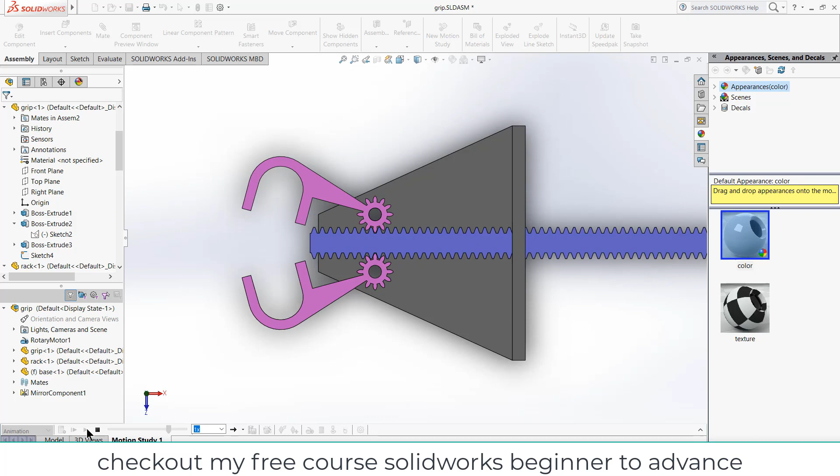So let's start. First of all, go here, click on assembly, click OK. After that, what you need to do is go to your toolbox, click on it, click on add in now, click on ANSI metric, click on power transmission, click on gears. Now import this rack.

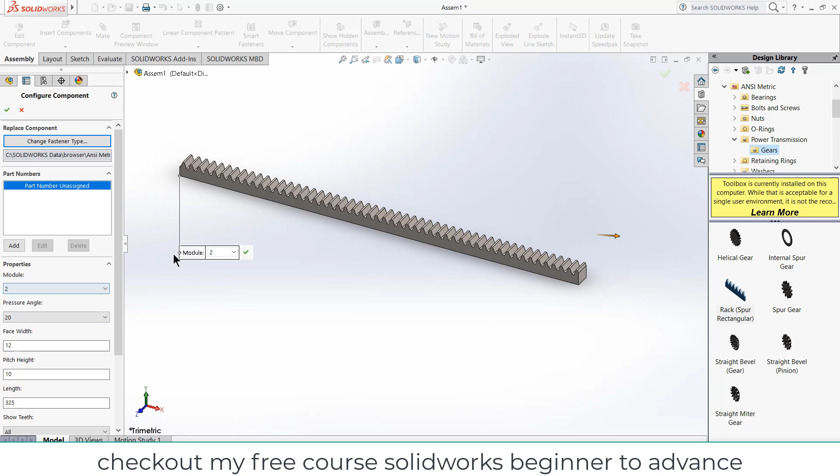Okay, make sure that the module is 2, pressure angle is 20, face width is 12, and total length is 323 point whatever, you can say 325. Click OK. Now close this. Select this face, click on sketch, press Ctrl plus 8. After that, click on convert entities. As you can see, the black line we already got.

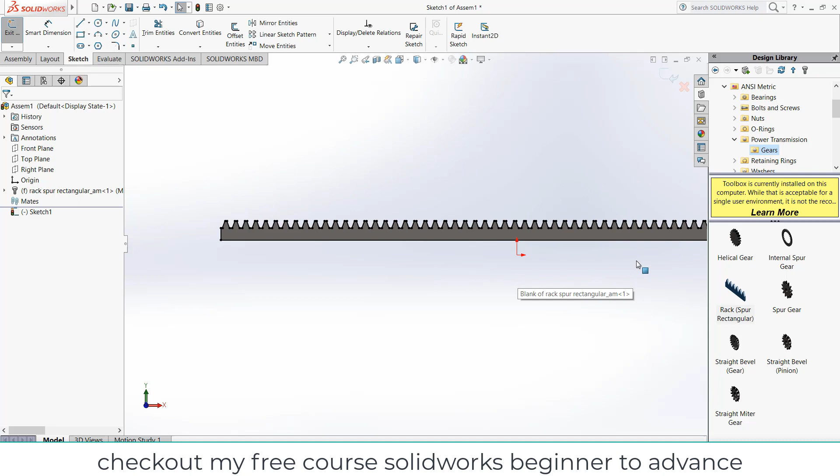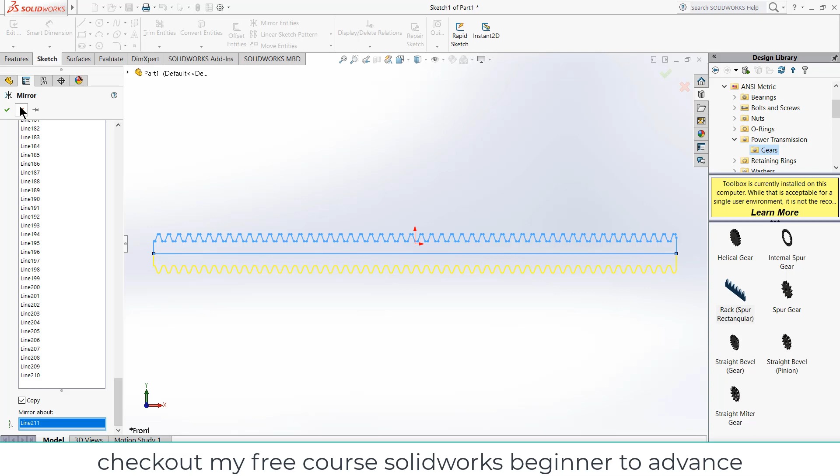Now what you need to do is press Ctrl A, press Ctrl C to copy the sketch. After that, click on File, New, Part, OK. Select the front plane, click on Sketch, press Ctrl plus V. After that, go here, Mirror Entities, move downwards. Click Mirror About, select this line, click OK. Now go to Features, Extrude it. OK. Extrusion is 10 mm. Click OK.

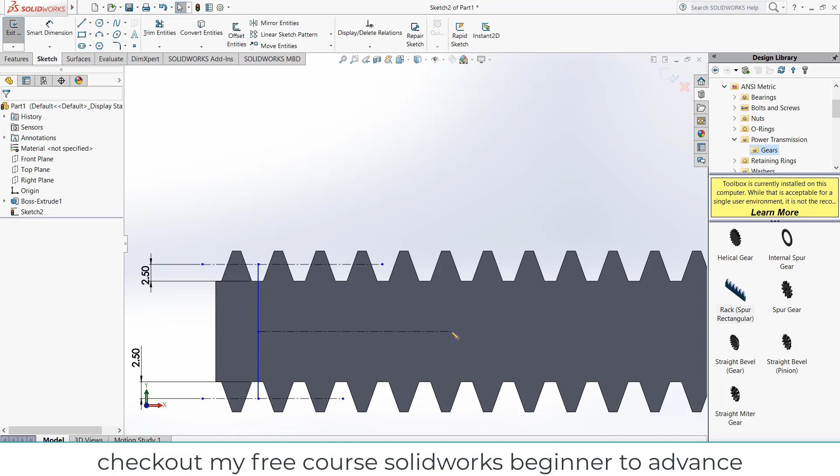So if I click on this face, click on Sketch, press Ctrl plus 8. You need to draw some lines as I'm showing. Same here as well. So these lines are 2.5 mm. Similarly here, 2.5 mm, and draw a line like this. Draw a center line. So just remember that this distance is 10 mm. Okay.

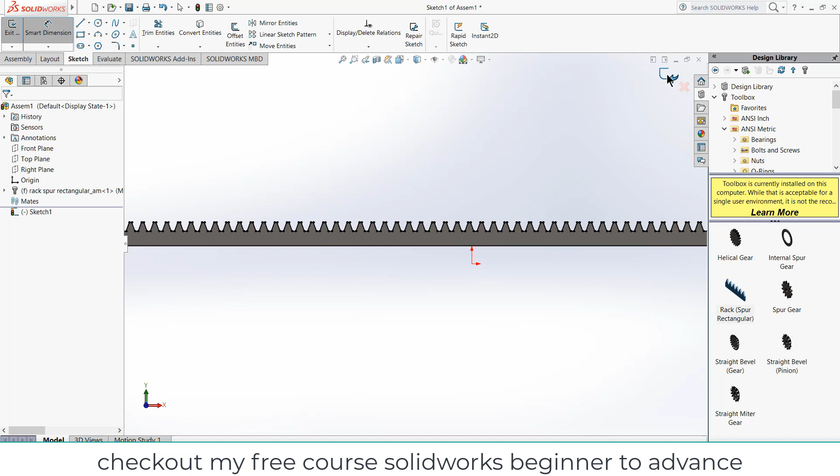A question may come to mind: why do I make this sketch when I can simply import it? The reason is that if I use or save this or do any kind of modification on this library part, it will mess up my whole library. So I don't want to mess up my whole library. That is the reason I create a new part from this sketch. Okay. So click OK, exit the sketch and right click on it, delete. Remember, I don't want to do any kind of modification in this part. That is the reason I'm not going to use it, because I'm going to save this file later onwards. That is the reason I create a sketch.

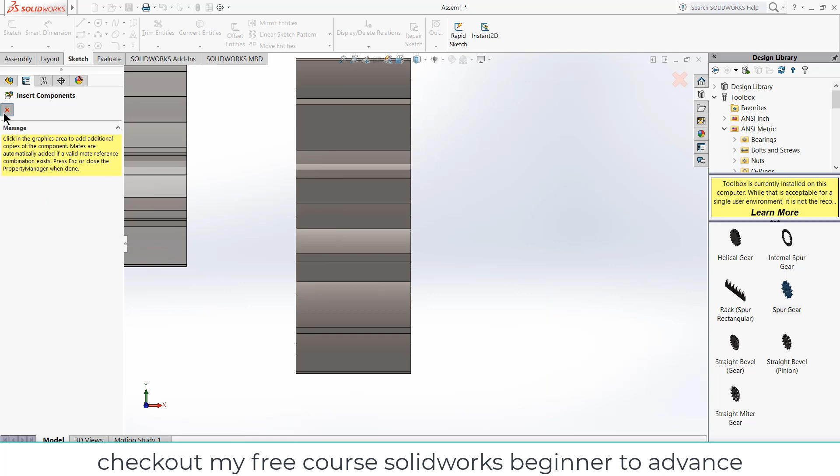Okay. Now, similarly, select the spur gear. Make sure that the module is 2, number of teeth is 12, and pressure angle is 20, face width is, let's say, 10, and click OK. Select this face, click on sketch, press Ctrl plus 8 for normal to the view, click on convert entities. Oh sorry, before we press Ctrl A, select this edge as well, click on convert entities. After that, press Ctrl plus A, press Ctrl plus C, yes.

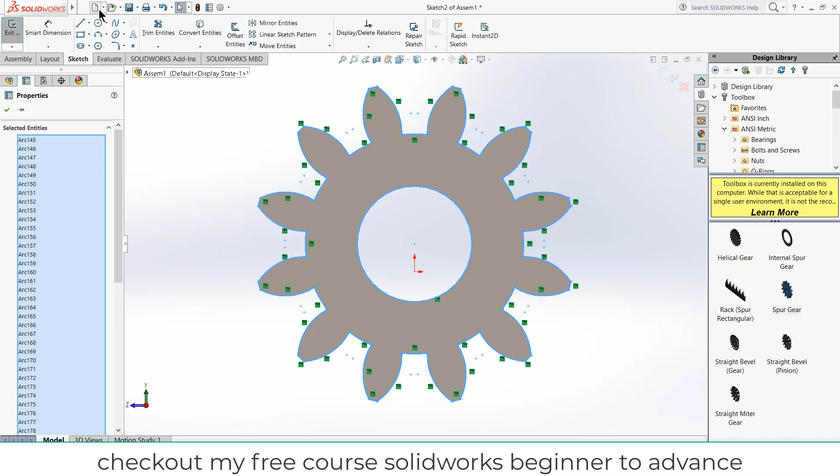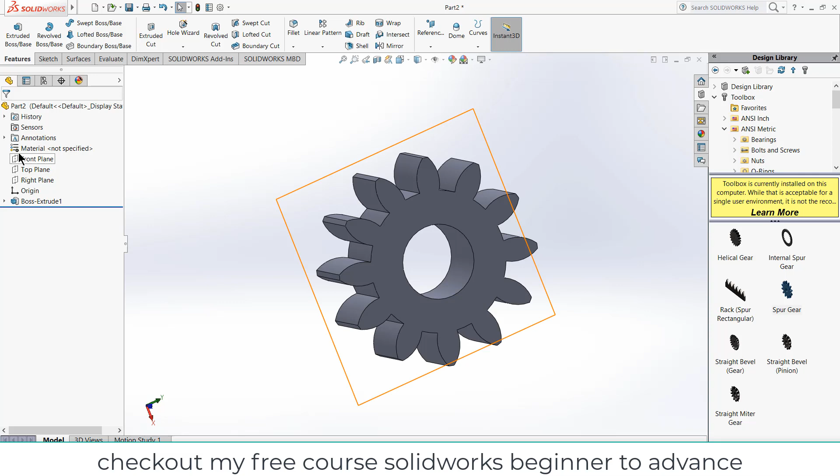Now go to File, Part, click OK. Select the front plane, click on Sketch, press Ctrl plus V, go to Features, Extrude, 10 mm, click OK. So we have made our gear as well. Now we are going to do some little modification here. So select this face, click on Sketch, press Ctrl plus 8.

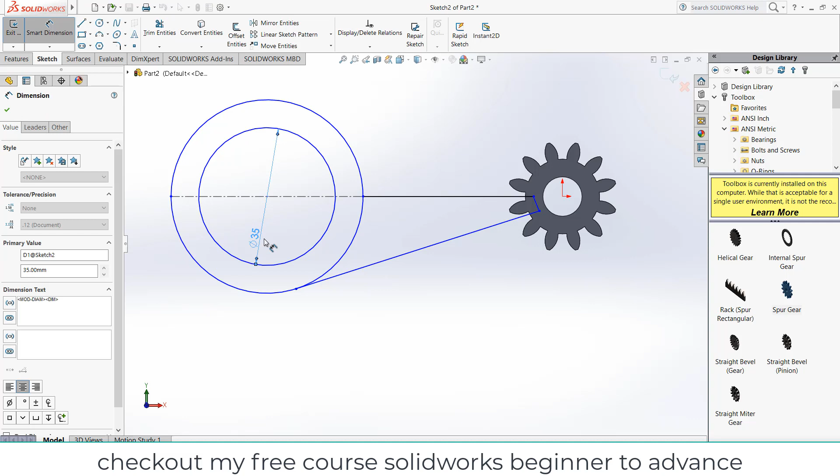Escape. Now select this circle and select this. As you can see, tangent relation is already there. That's what I wanted to create, but it's already there, so I don't need to give any kind of relation. Give it dimensions as per your requirement. Let's say 35, and this one is 50. Now click on trim entities, trim these.

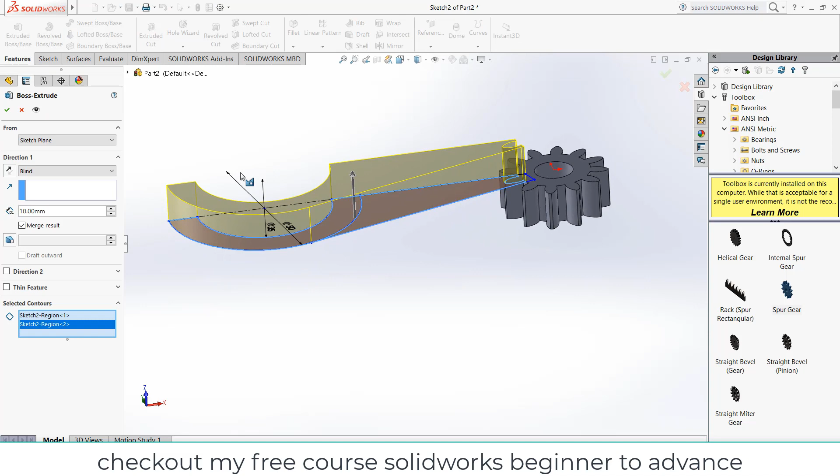Now one more, escape. Now go to features, extrude it, select this face and this face, and this one as well. Click on reverse direction, click OK. So we have made this. Now press Ctrl S, name it as grip. For the first part to be saved, first exit the sketch. Ctrl S, name it as rack.

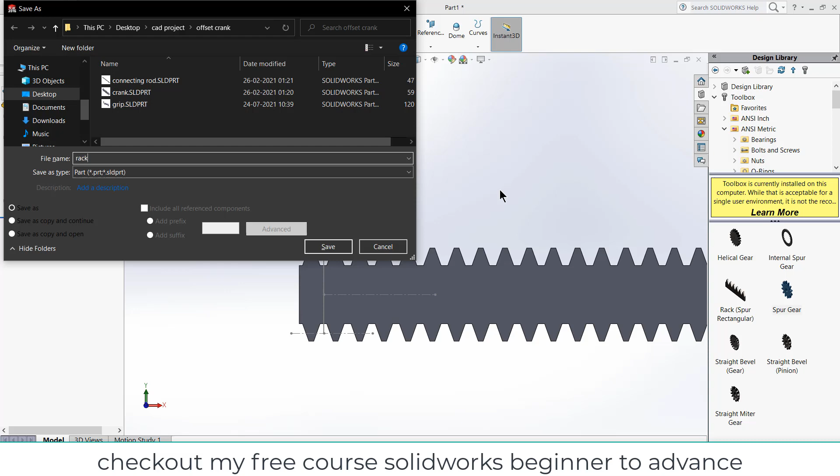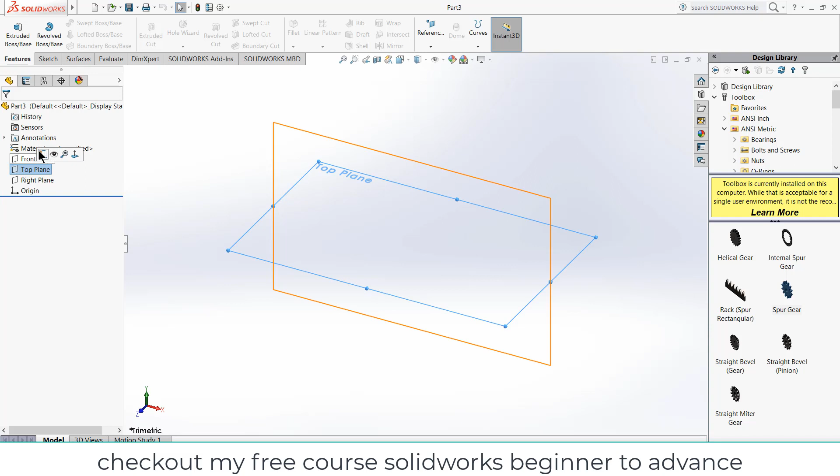Now click on here, click on assembly, click OK. Import these two by pressing Ctrl. I have to make one more part on which basically they are both going to attach. So let's make that one first. So click on file, part, OK. So select the top plane, click on sketch, escape. Okay, select the front plane, click on sketch, front plane, sketch.

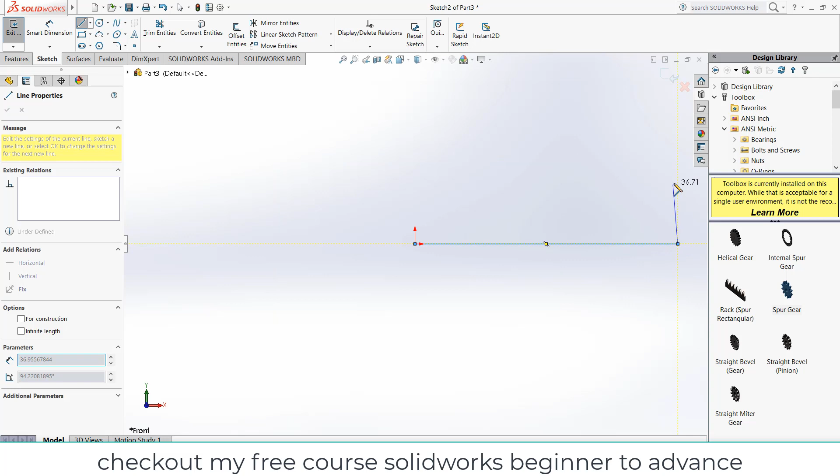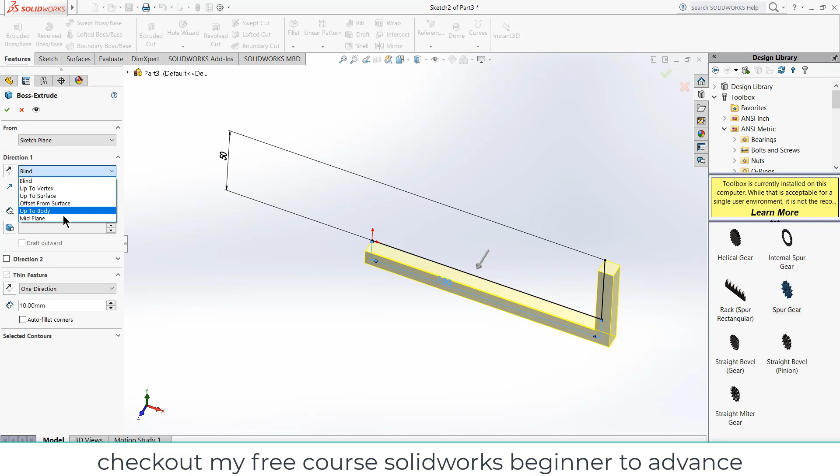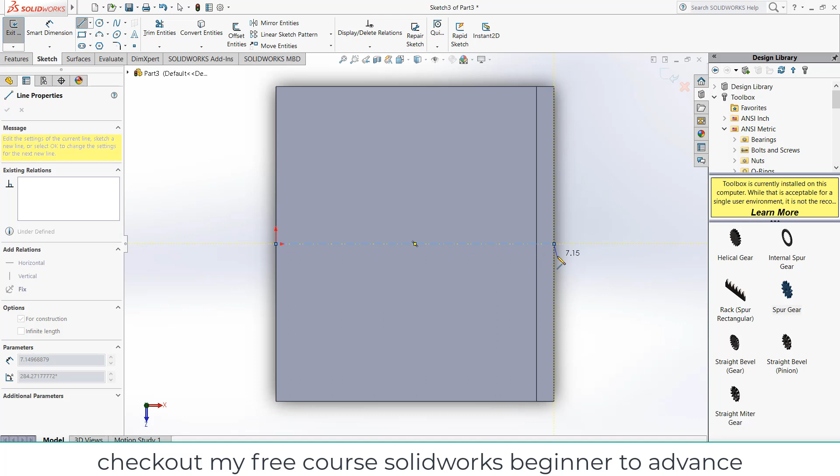Escape. 50 mm, 150. Go to features, extrude it, mid plane, click OK. Select this face, click on sketch, press Ctrl plus 8. Draw the center line first. Draw a circle here. This one is going to be 10 plus 2, or 12.

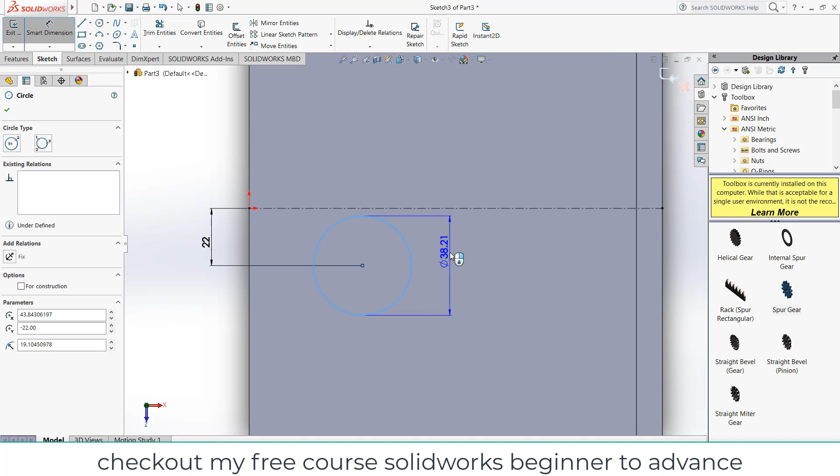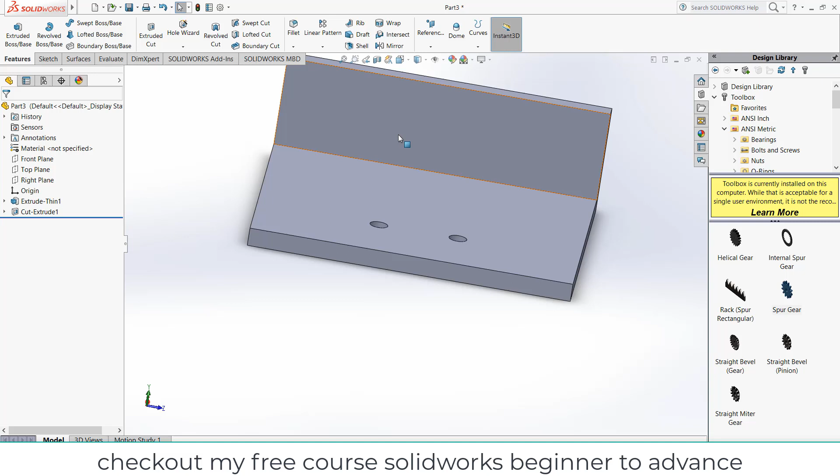Yes. 22, 10 mm. Click on mirror entities. Sorry. Select this and click OK. Click on extrude cut. Click OK. Remember that I might change the dimensions, so it is not the final dimension.

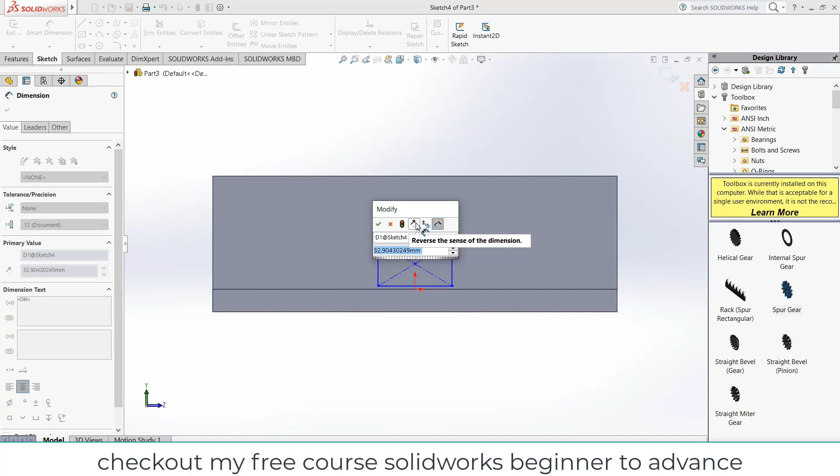Now select this face, click on sketch, press Ctrl plus 8, select center rectangle, it says 32, 11, select this point and this point, make it vertical, select these two lines, make it 13 mm.

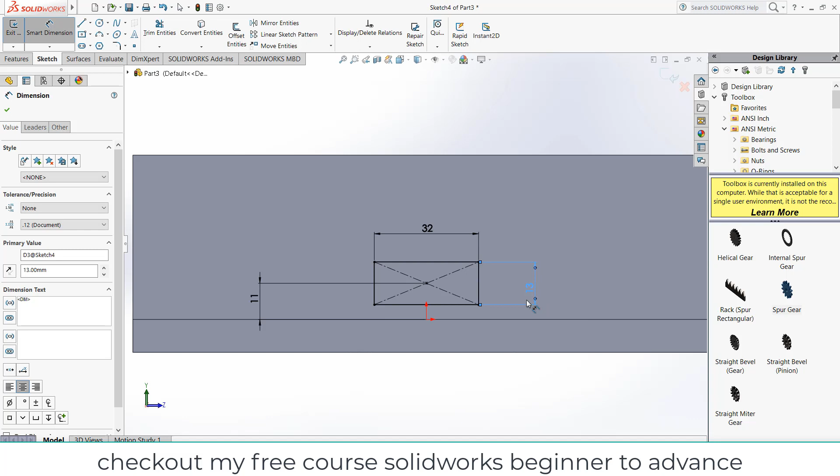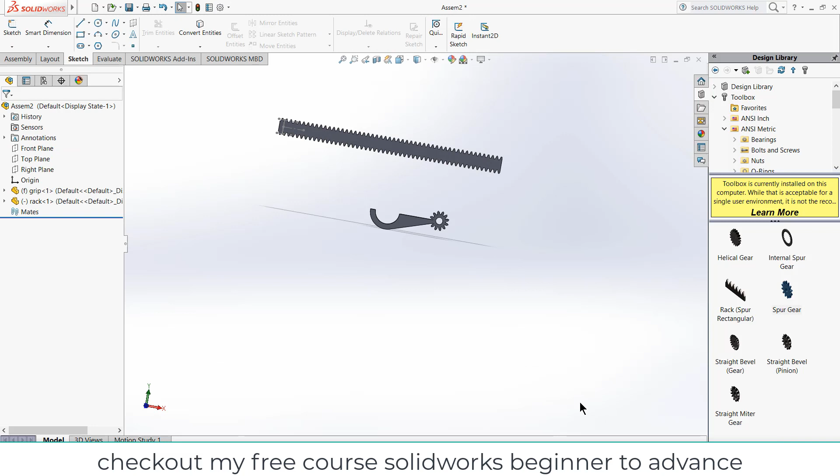Features, extrude cut, OK, press Ctrl S, name it as base. Now go to your assembly, import this one as well.

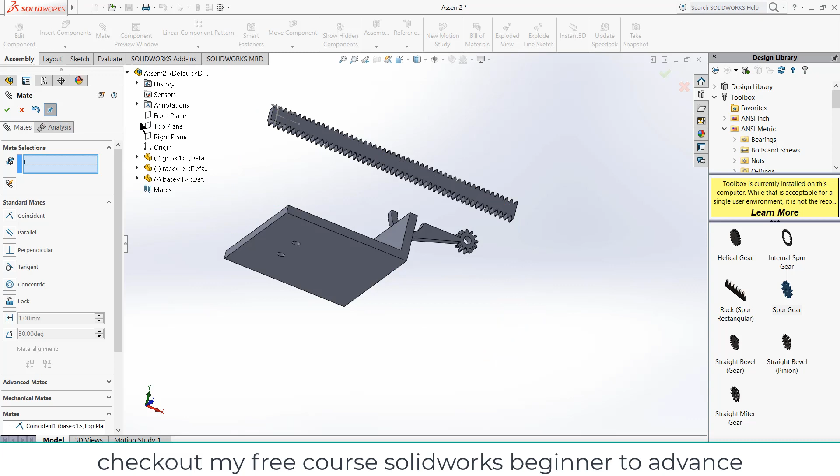Now first I have to select this face, click on mate, select the top plane, and mate it. After that select the front plane of this base and mate it with the front plane of that.

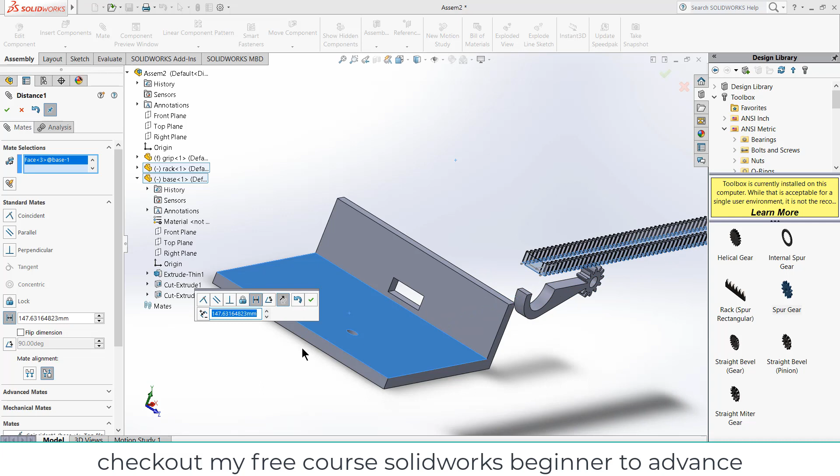Now select this face and this face, click on distance, and give it a distance of 3.5 mm. Click OK.

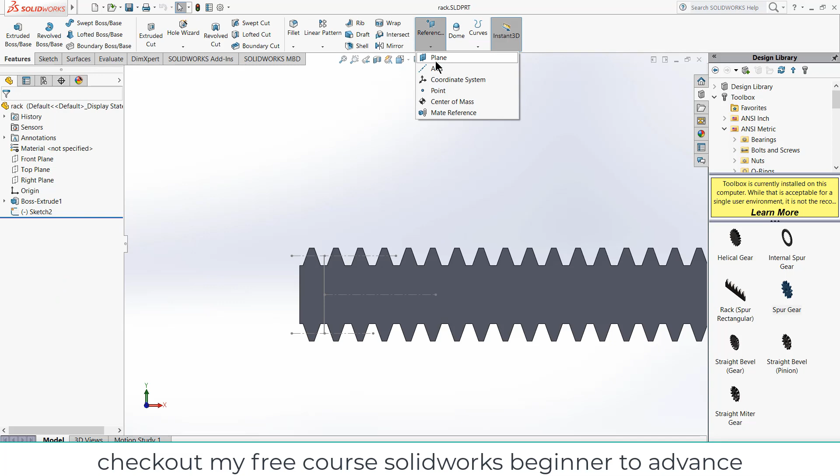After that, go to the rack. As you can see, the rack center is not in the middle. So what we can do is go to this part and click on plane, select this line, make it perpendicular. Or simply select just these two surfaces, this surface and this surface. It will create a sketch exactly in the middle, and that is what we want. Name it by double clicking on it, name it as mate plane.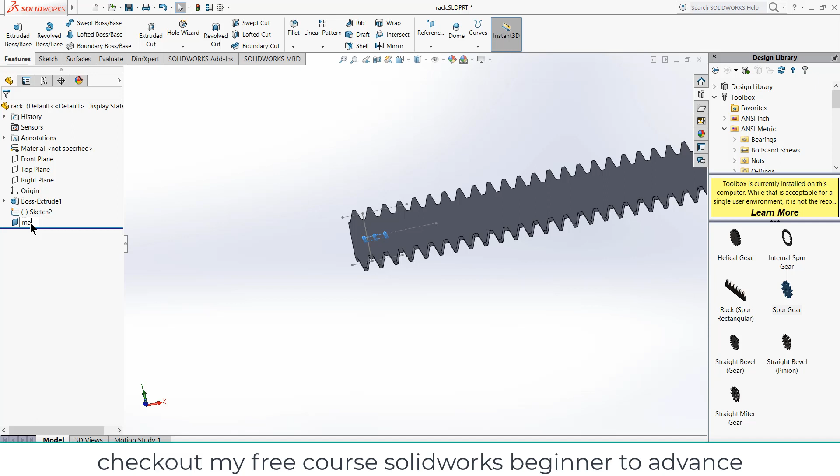Now go to your assembly. Click on mates, click on mate plane, select the front plane, click on sketch.

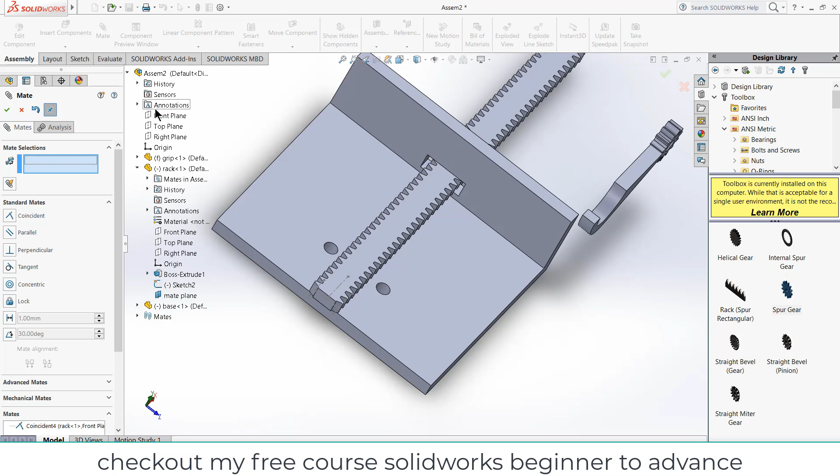As you can see, if I try to move this part, a pop-up shows the component is fixed and cannot be moved. So to move this component, simply right click on it and click on float.

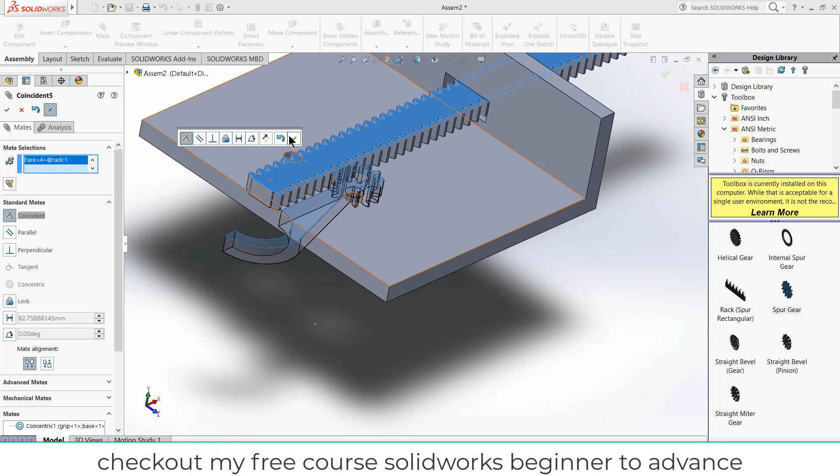Now go to mates, select this face, select this face, click OK. Select this face and this face, click OK. Select this face, press Ctrl plus 8.

Now move the rack, not the pinion. Remember, you have to move the rack.

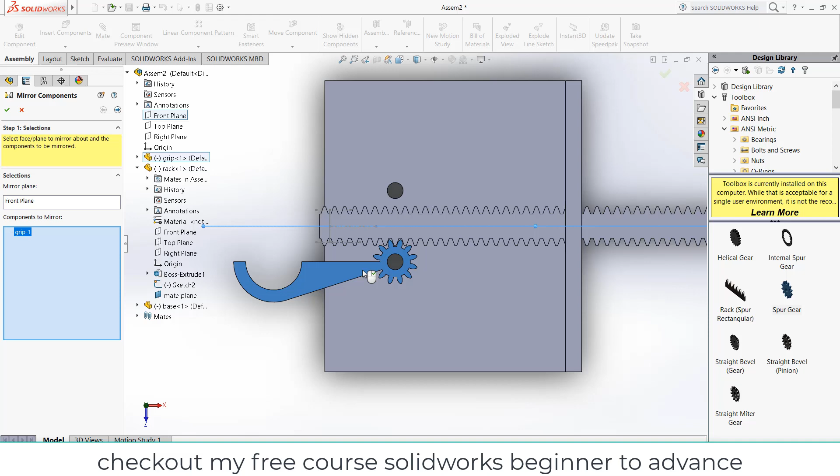Now go to mirror components. Select the front plane, select this part, click OK. As you can see, the grips are not totally joining with each other.

So what we can do is first save the assembly. Control S, save all, grip.

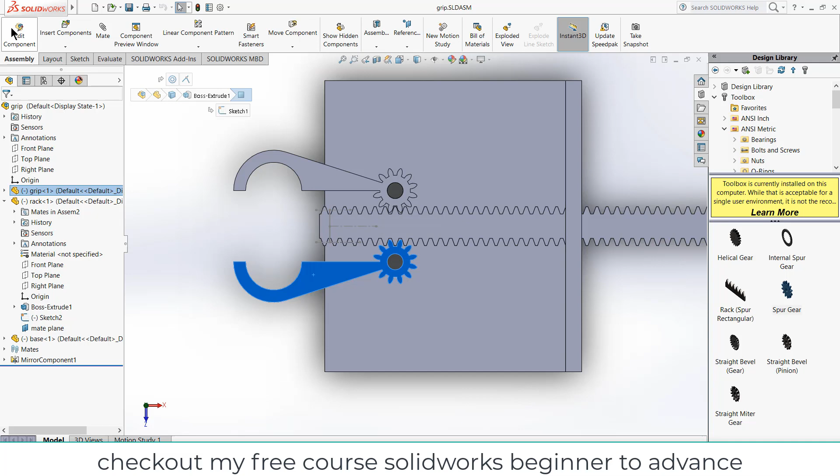Now select this part, click on edit components. I'm just going to do some tricks to make it work, so let's see what I'm going to do. Select this face, click on sketch.

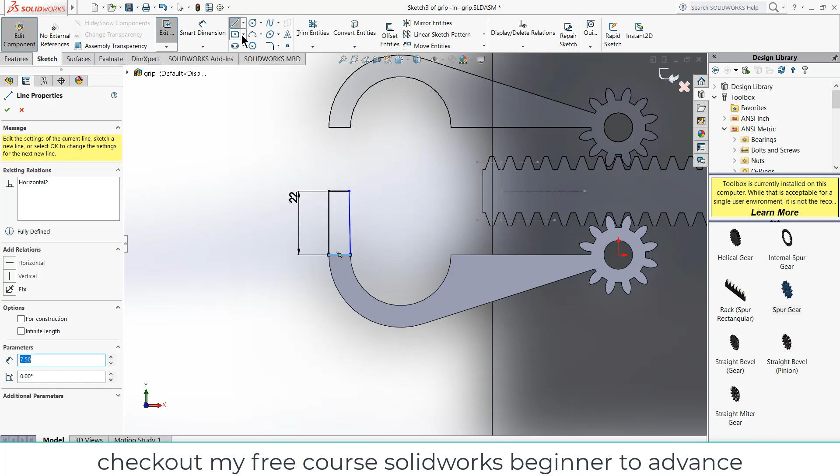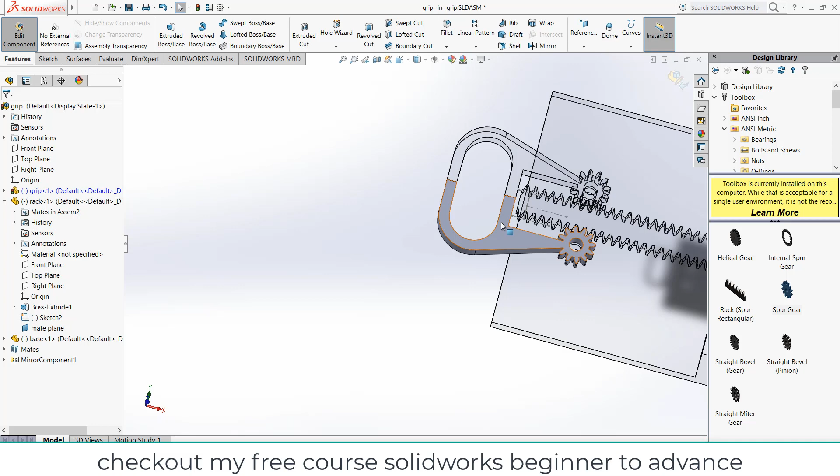Go to features, extrude, reverse direction, click OK. As you can see, it created on both sides. Now exit the edit component mode.

Now the other thing left is how to rotate this rack and pinion. So click on mates, click on mechanical mates, click on gear. So rack and pinion - here the rack is this one and the pinion is this one, and here the pitch diameter is 12 mm.

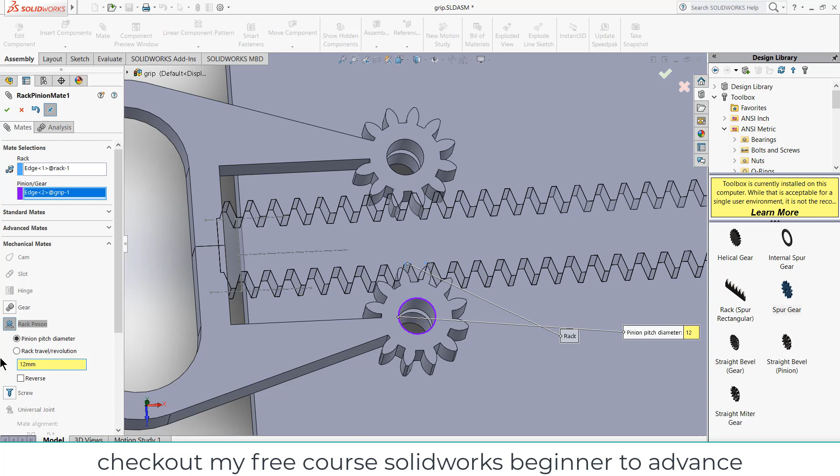Namaste guys, in this course you are going to learn about SolidWorks. In the first chapter you are going to learn about basics of animations like explode view, as you can see now.

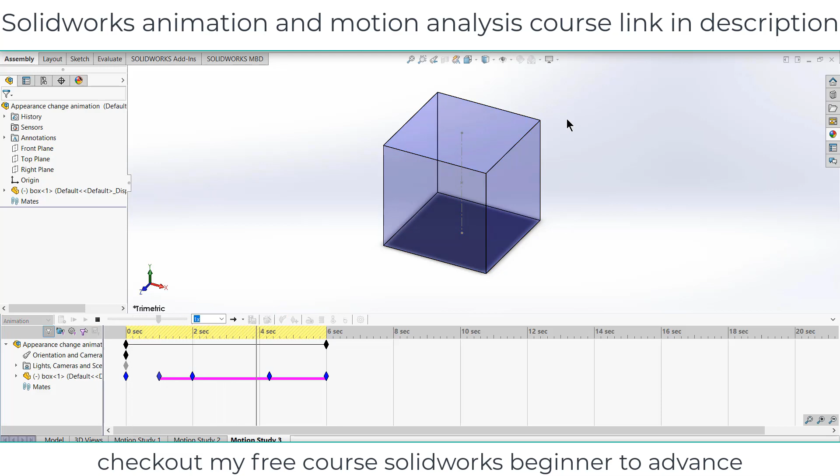And you will learn about how to change color and appearances in animation, how to make a mechanism - here as you can see an offset crank mechanism - how to make a 4-bar mechanism and analyze its trace path, and how to make it more correct.

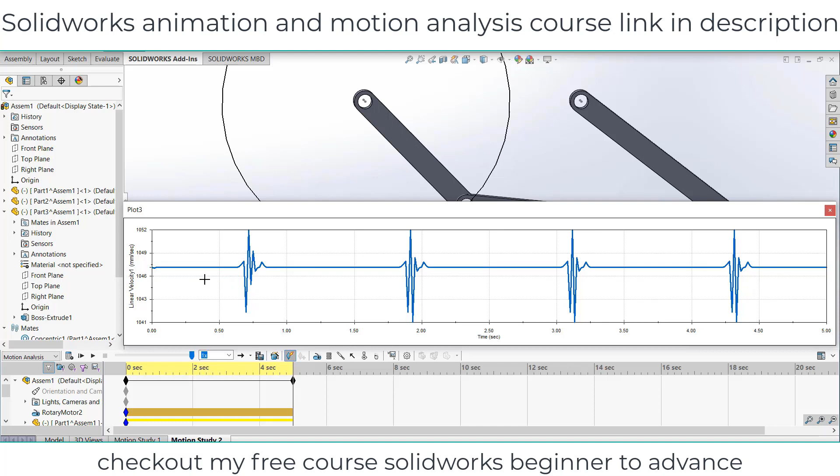We will also plot various kinds of things like acceleration, velocities and other parameters in a 4-bar mechanism. While analyzing, we will calculate how much torque or energy is required in a certain mechanism.

In SolidWorks motion analysis, after all this, we will learn event-based motion analysis that is very important in real life for making animations of robots and machines.

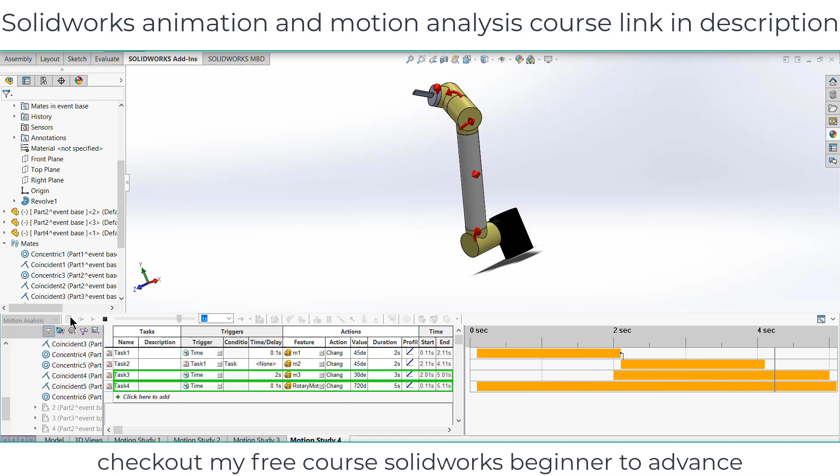You will also learn what are the different ways to animate, and everything is covered in this course.

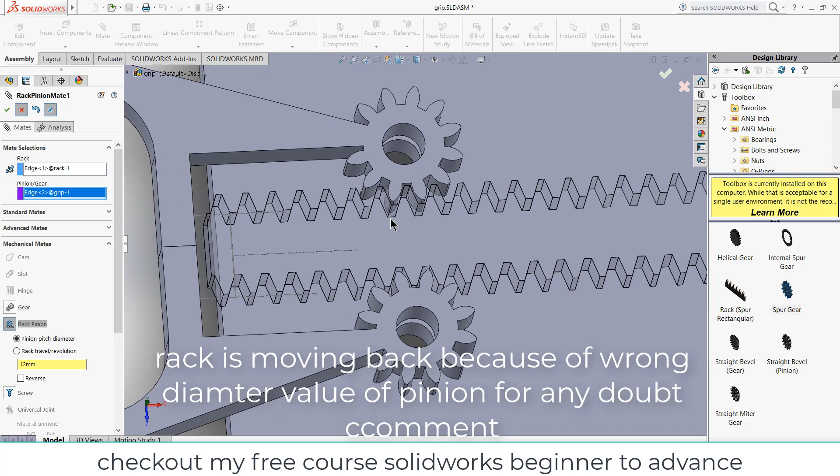I don't know why it just rotated from its main position, but it will create an error for us. Let's try again.

Mechanical rack and pinion, 12 mm. First, here you can see the rack - you need to select the rack edge. After that, select your pinion. This one is basically 12 mm.

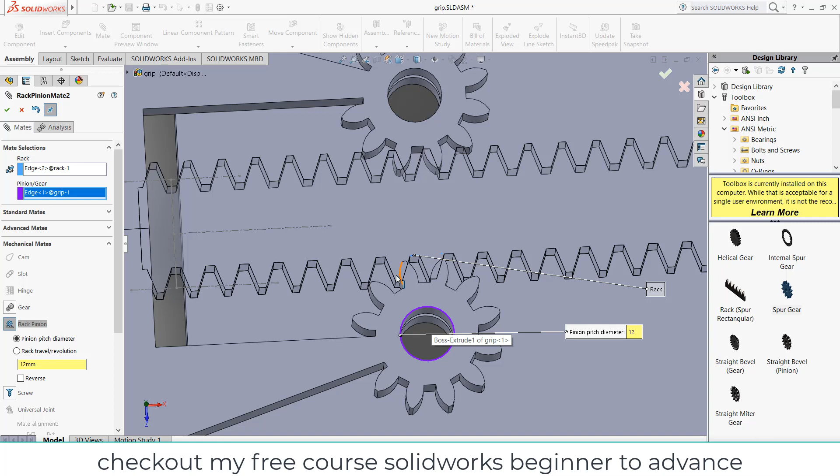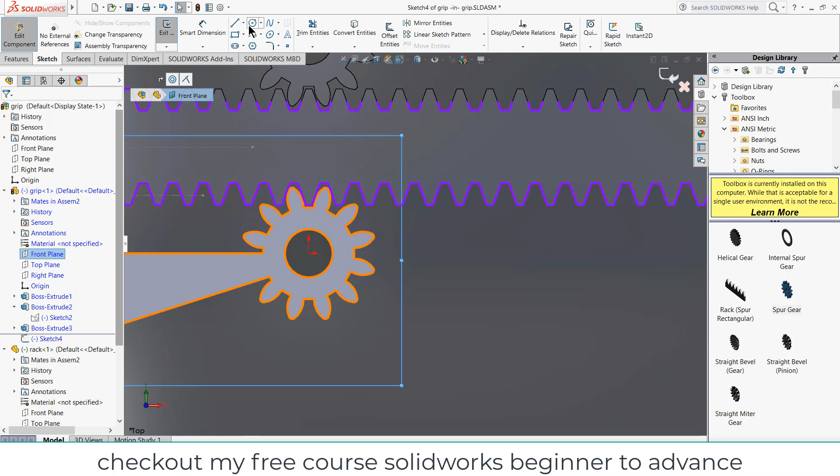So let's see what we can do. Select this gear, click on edit components, select the front plane of it, click on sketch, press Ctrl plus 8, draw a circle here, give it a diameter of 24 mm, click OK, exit the sketch, exit the edit assembly component mode.

Don't worry, when I do the animation, this circle will be gone. I will show you how.

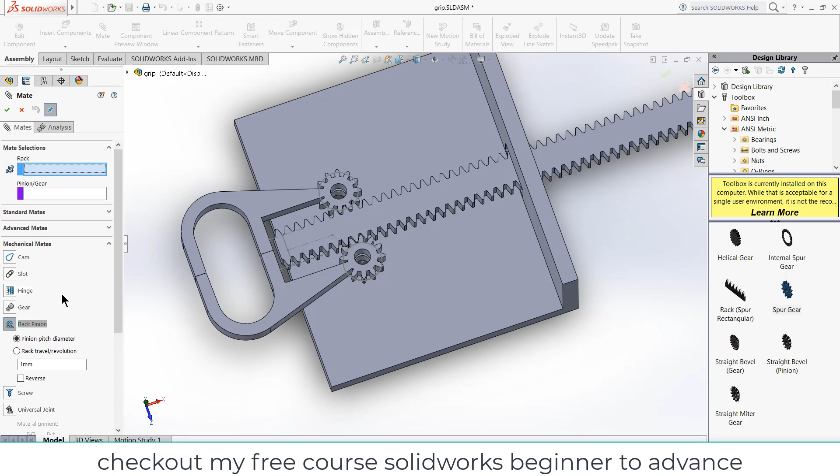Now go to the mates, mechanical, rack and pinion. First select the rack, after that select this. Okay, now click OK. Now if I try to move it, you can see it's working now.

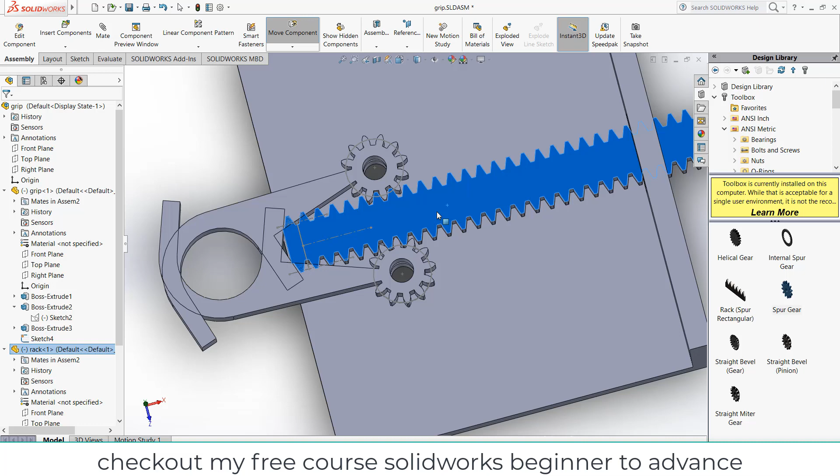Now I need to define some mates, so that as you can see they are interfering with each other. I don't want them to interfere with each other, so press Ctrl Z.

So what we can do is define some mate distances. Click on mate, go to advanced mates, standard mates, advanced mates, I guess. Yes, advanced mates. So select this face and this face. Okay.

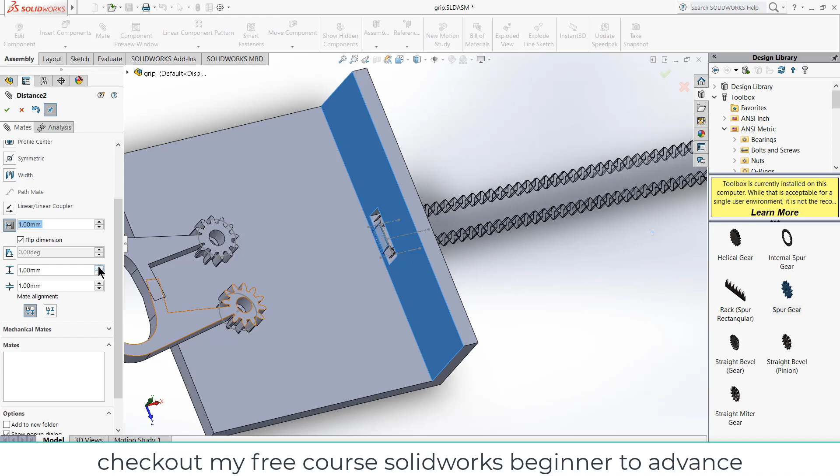The reason I was trying to do that is I just want to give the distance from here to here. As you can see, mates is showing a problem. So we will use some indirect approach. I am very good at indirect approach instead of direct approach.

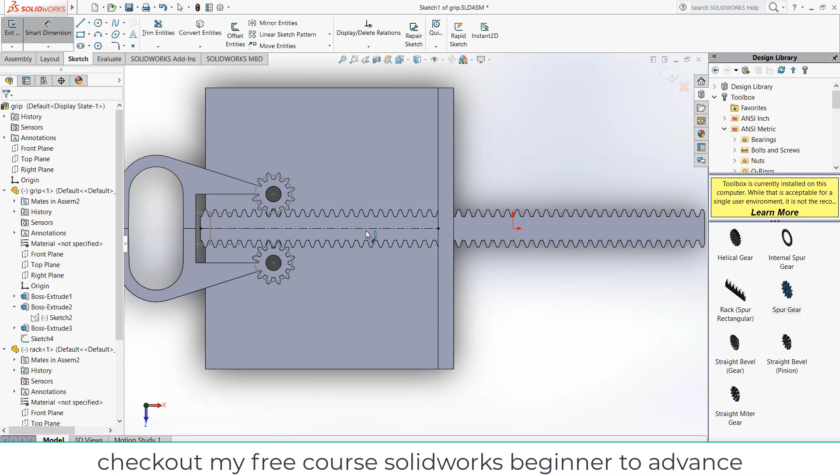So sorry for that. So measure the distance. It is 153.25. Now delete this line. 153.25, okay, remember it. Now go to assembly, mates, advanced.

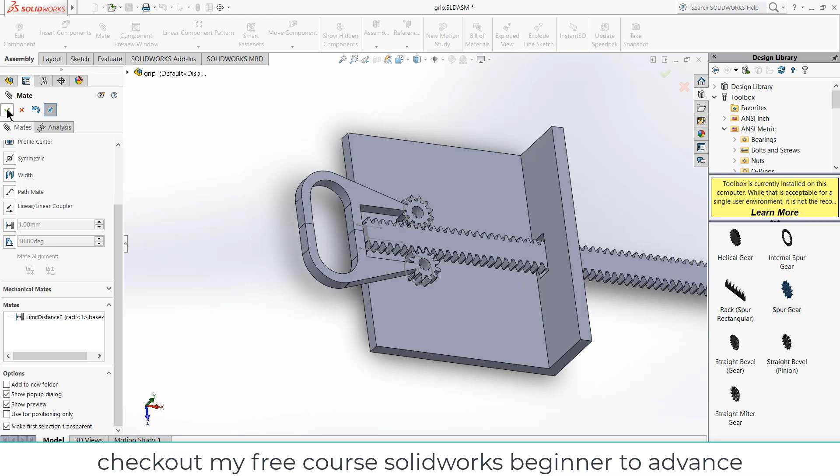Select this face and this face. Enter the value of 153.25. Okay, and the minimum distance is, let's say, 50 mm. It's up to you again. Click OK. So what's going to happen now is...

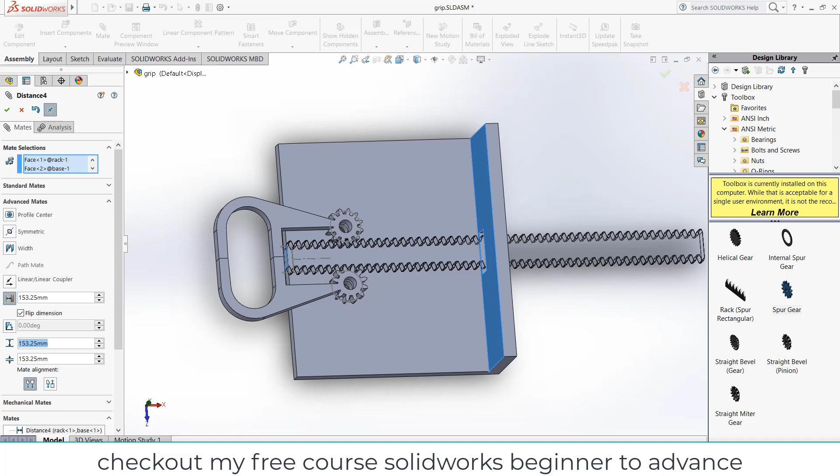Okay, I made a mistake. Actually, the minimum distance should be 153.25, and the maximum you can say 200 or whatever. Click OK.

First you need to right click on this base, click on fix. Now if you try to do the animation, you can see now I have to do one more thing about this, so that it doesn't interfere with it.

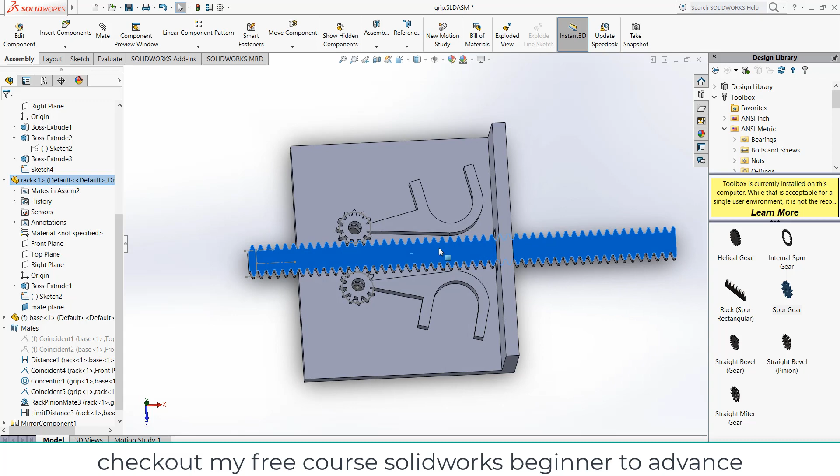So what we can do is go to evaluate, measure, again a non-standard method. So check out the dimension of the black line, 188.14.

So right click on it here, edit. The best part of watching this one is that you can see what kind of mistakes I make, and those are the best things, that you learn from it. So yeah, it's a good thing.

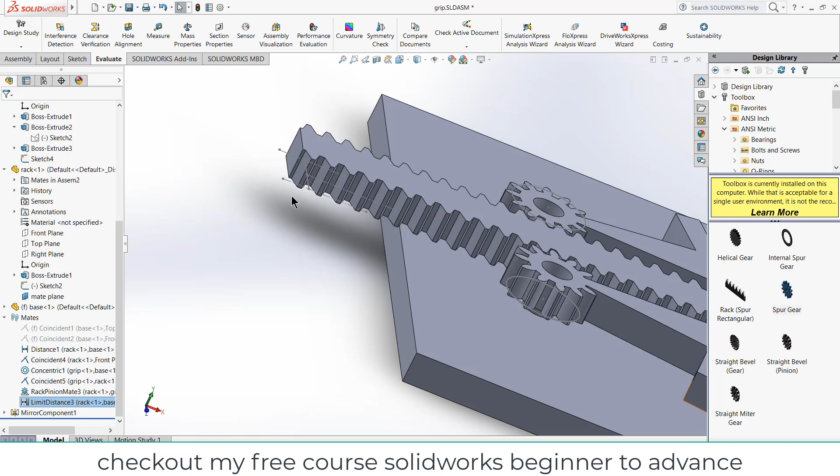So you can see I made a hand gripper mechanism. Now we have done that much.

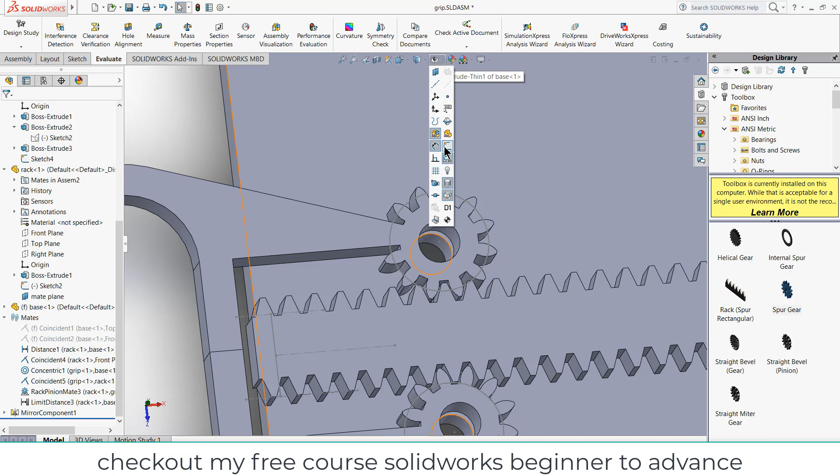Now let's give some color. And here you can see these lines. So how to remove these lines without deleting them? Simply go to the eye, click on sketch, and boom, all lines are gone. So now let's give them some colors.

So click here, click on rack, give it a color as per your requirement. Let's say this one. Now select this one and give it a color.

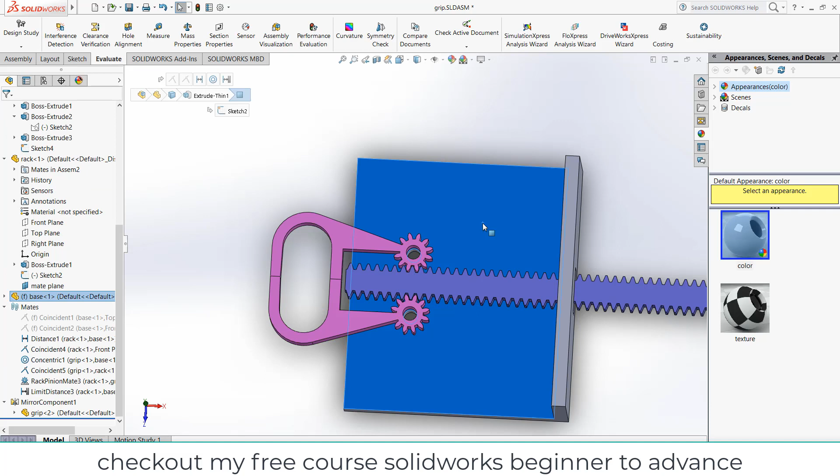I'm very bad at coloring, so if anybody doesn't like it, sorry for that. I guess the pink one looks good. This one also looks good.

Now do some little modifications. So this one also looks good. Select this one, click on assembly, edit design, select this face, click on sketch, press Ctrl plus 8.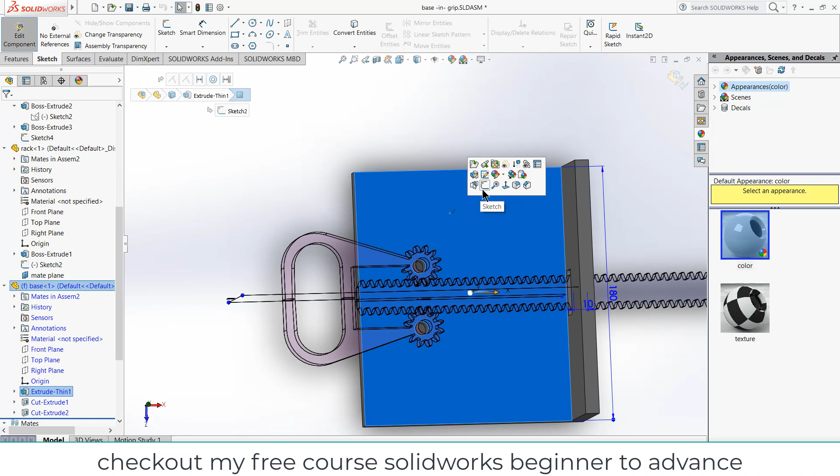First draw a line like this. This is called a center line, because I'm going to use the mirror command—just being a lazy person.

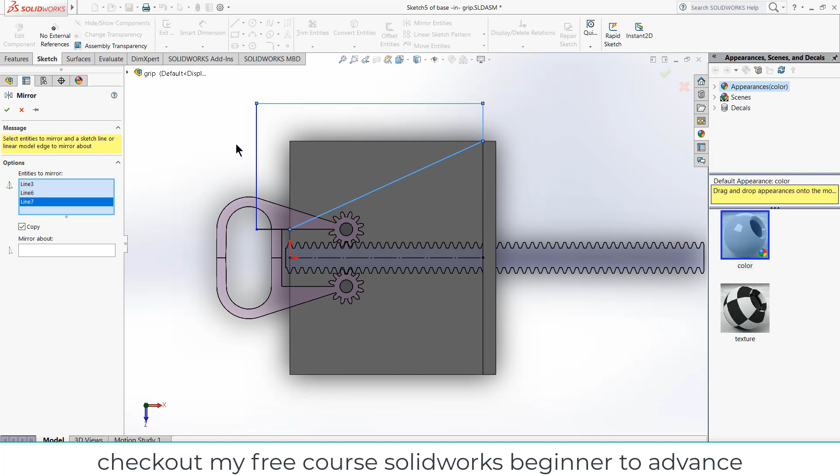Now click on mirror entities, select these lines, click on mirror about like this, click OK, click on features, click on extrude cut through all, exit the sketch. So you can see I have made it.

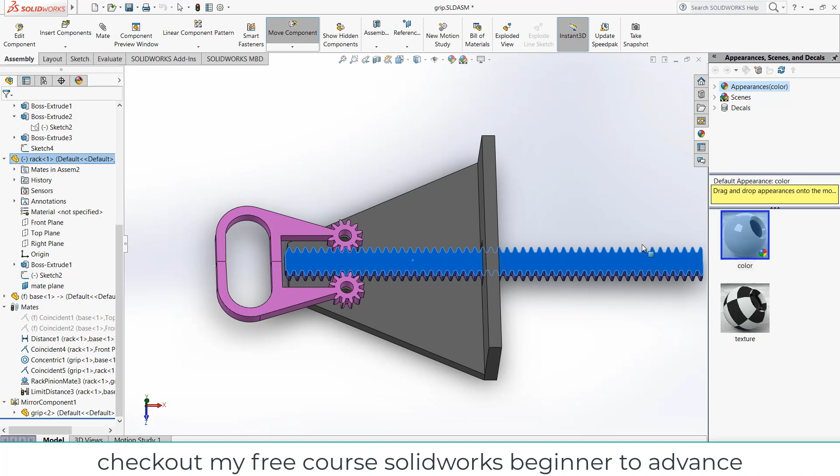Now let's do some animation stuff. Go to the motion study, select this face by pressing Ctrl plus 8. So what you can do is, this is the first position. Now go to 6 seconds, move it forward like this.

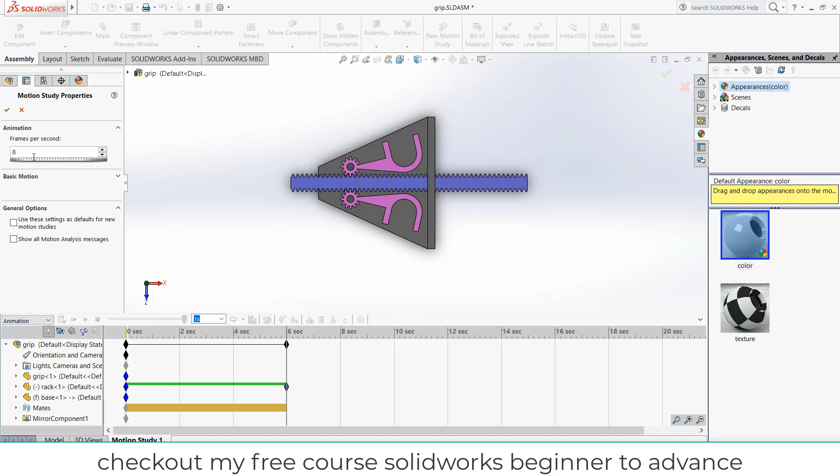Okay, now go here, increase the FPS to 30. You can increase or decrease the FPS as per your requirement. Now click on play, calculate basically, sorry.

Nothing is happening. Okay, I guess I have to go to... what I can do is, instead of using these keyframes, select this, delete, I'll use a motor instead. Select this, click on reverse direction, click on distance 90 degrees, starting at 0, ending at 5 seconds, click OK.

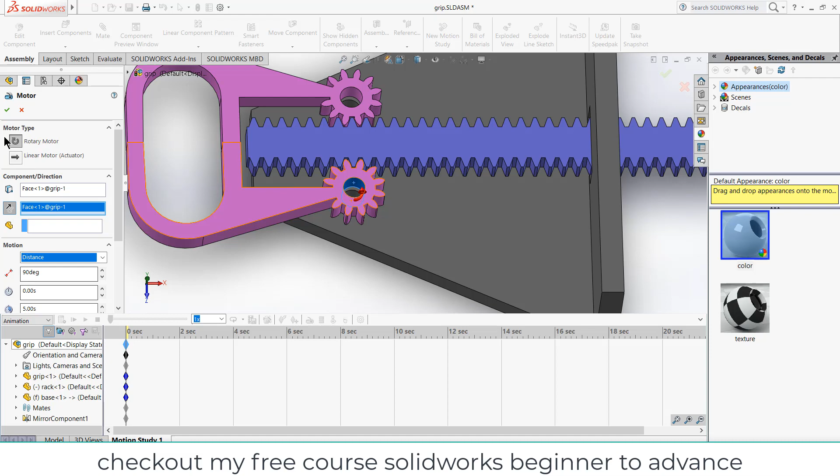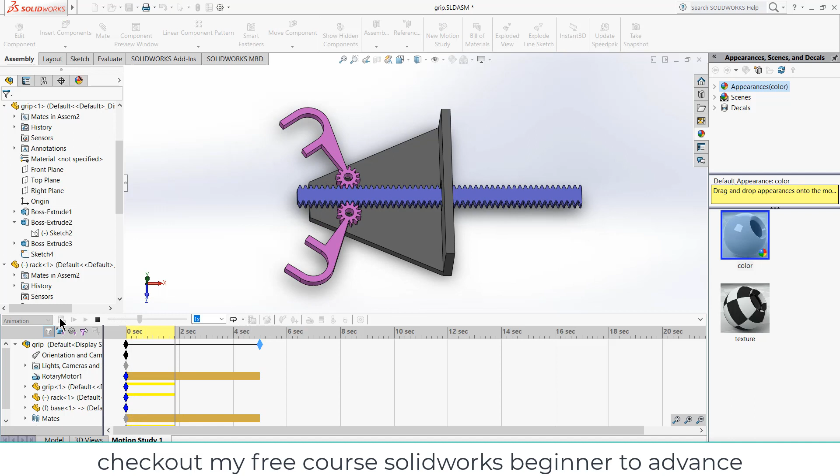Now click on calculate. You can even go to 180 degrees if you want. Click OK, calculate. Right click on it, click on edit feature.

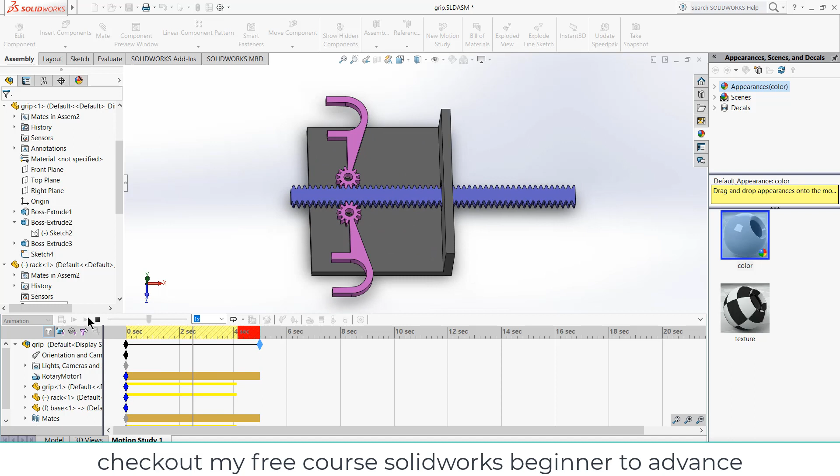So yeah, that's all. I hope you guys learned something from this video, and you can see something odd. For example, this sketch, going that way.

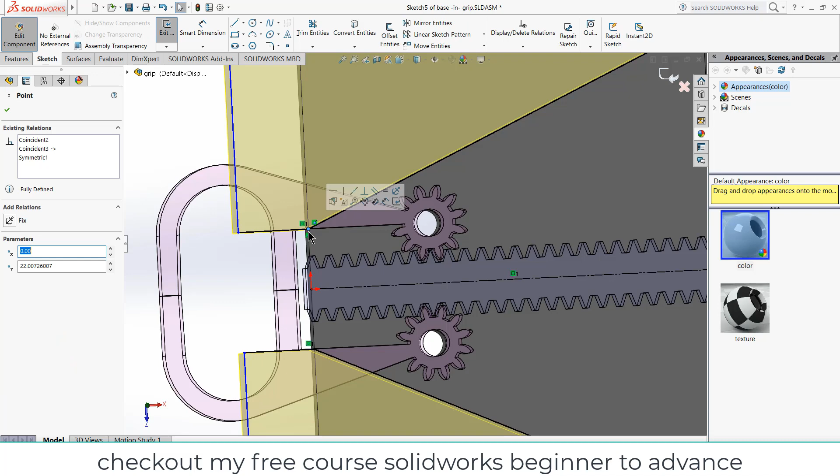So select this, edit components, model, select sketch, delete it, delete it, exit the sketch, exit. Click on calculate. Now you see it's correct now, and it's working.